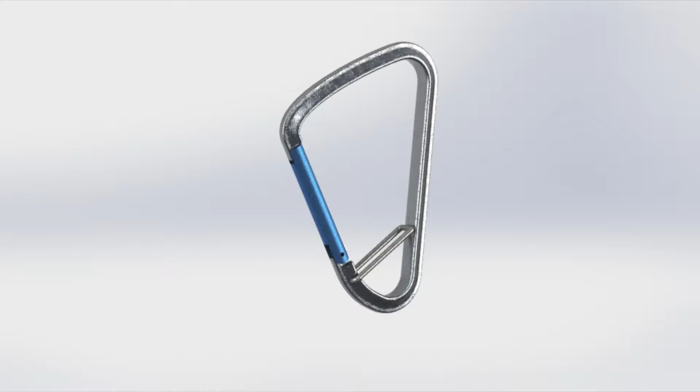Climbing gears are used by rock and ice climbers, mountaineers, and alpine skiers. Safety is number one. Lightweight and strength comes next. The tolerance should be extremely low, as failure in these parts is not acceptable. SolidWorks applications are used to fabricate the 3D designs electronically, and Abaqus CAE is used for structural analysis. Changes in designs were made in order to make corrections and have improvements.

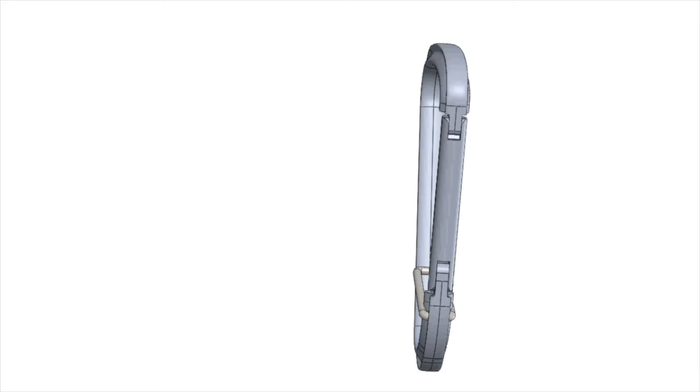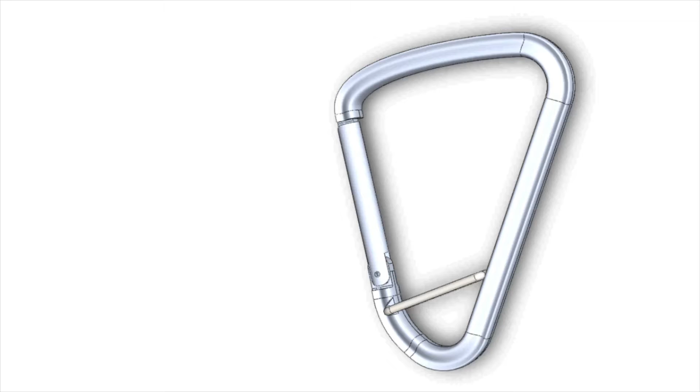The most basic tool in climbing gear is the carabiner, because it is the link between different pieces of equipment. For the design, I started off by looking at existing designs such as this one and this one. I came up with the idea to concentrate the load along the closed side of the carabiner, as that side is the strongest one. I did this by giving the carabiner an irregular triangular shape. The clip prevents the carabiner from rotating upside down or becoming subject to cross-loading, which is loading along the horizontal axis.

Shown dimensions are in millimeters. The opening of the carabiner is as big as possible for easy hooking and unhooking of ropes. Most of the load will be carried by the inside part of the cross-section. That is why more material was added there. Stress analysis on the carabiner with that cross-section shows stress concentrations at the top and bottom of the inside of the load-carrying axis of the carabiner and low stresses on the outside.

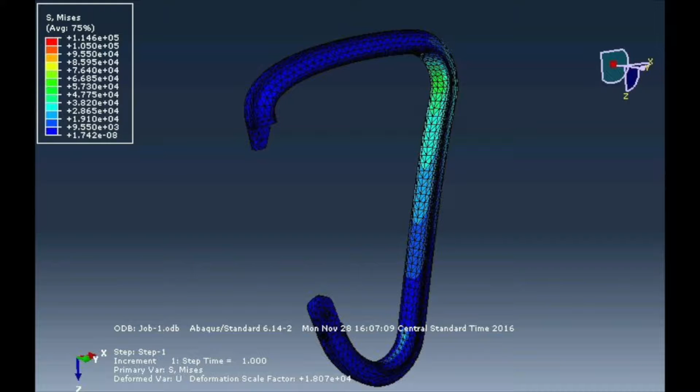So in order to make the design as efficient as possible, the cross-section was altered. This results in lower peak stresses on the inside surface of the carabiner and lower stresses on the outside surface of the carabiner. The final product has an aluminum core and opening link and a steel clip. The stress analysis shows that the carabiner can safely carry a load of 14 kilonewtons and weighs 17.65 grams.

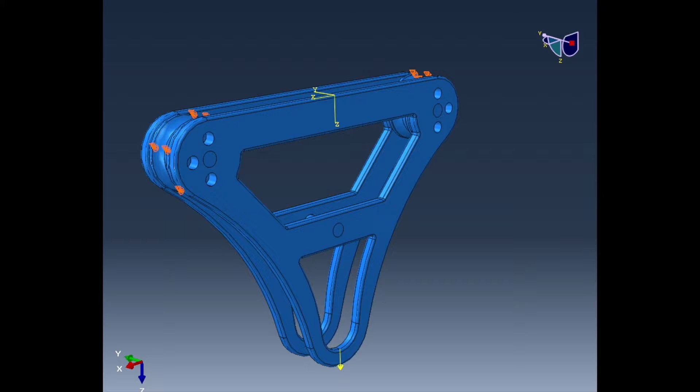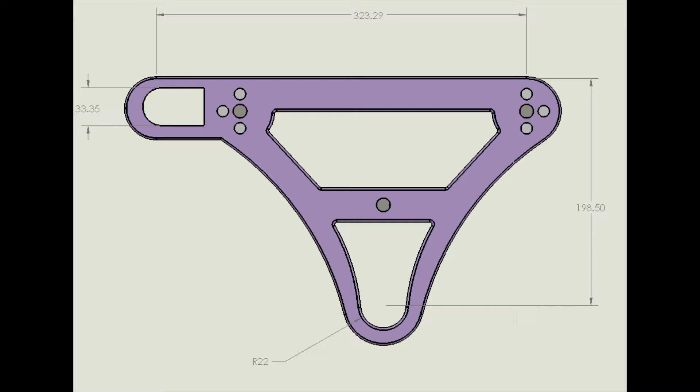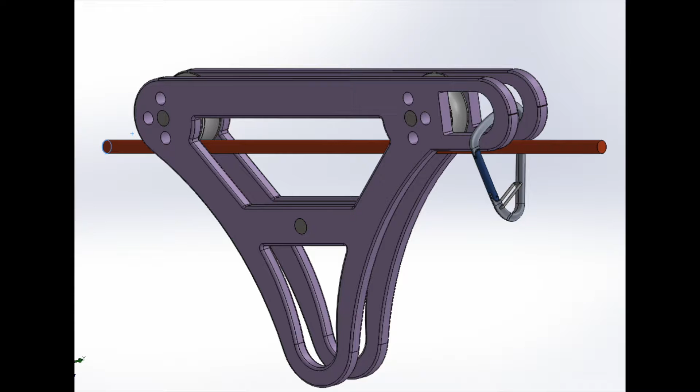For improvements of the design, I changed the thickness to 1.3 millimeter and added an additional hole at the backside to connect with a carabiner for user safety. I set the same material, aluminum alloy, and the same boundary conditions and load, and this is the result of the Abaqus simulations. I can check that the stress magnitude and deformation are less than before. This is how to connect the carabiner with the zipline. If the zipline is derailed for some reason, it could prevent the user from falling down.

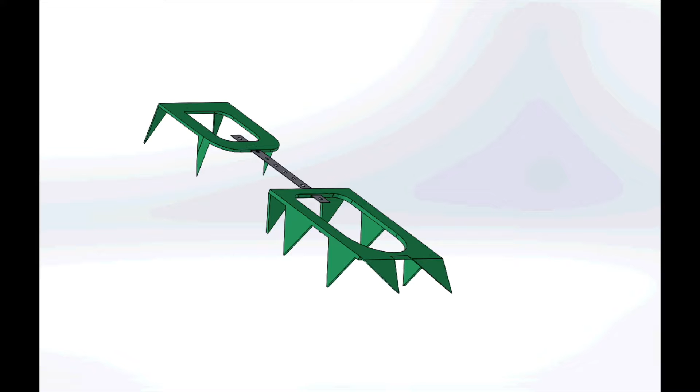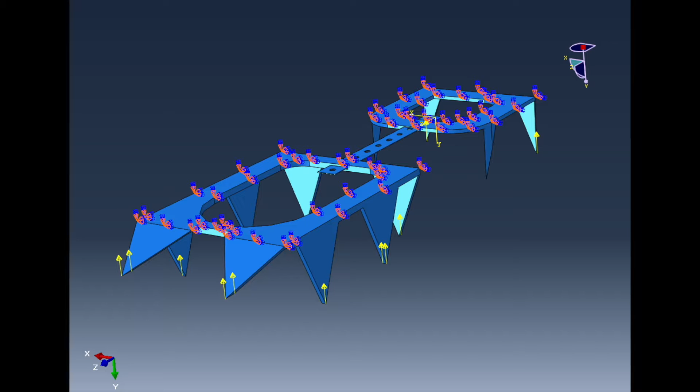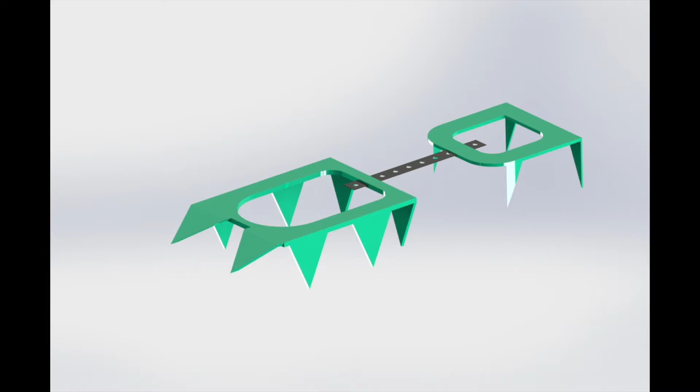Crampons are designed for secure travel on snow and ice for mountaineers. What I focused most on in my design was three features: lightweight, adjustable for multiple sizes, and strong enough to support the shocks of ice and rocks, especially the spikes. For my analysis, I added the boundary conditions on the top surface of the crampons, and I added my force concentrated on each spike. When running the analysis, I realized that the front end spikes are the most fragile. So I added some reinforcement to it, and this has decreased a lot the stress concentration on this part. For my final design, I chose aluminum as it is ideal and lightweight for alpine climbing. Each crampon weighs 65.4 grams.

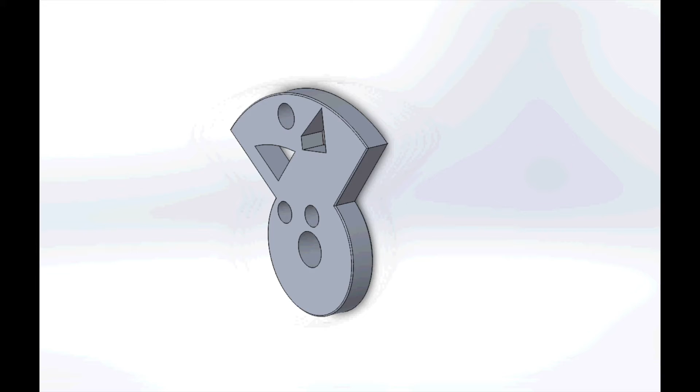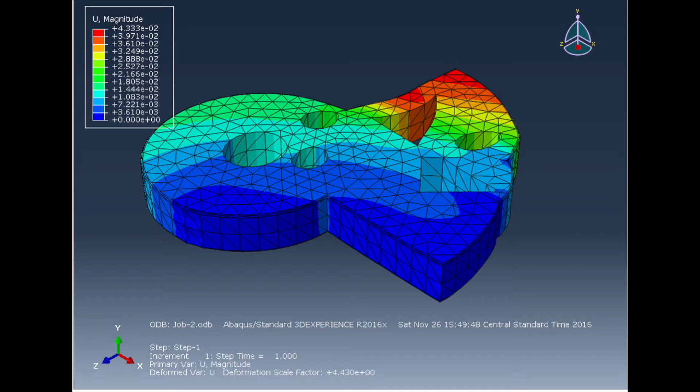In order to reduce the stress concentration, smaller holes are needed. This is my second design. I increased the thickness by 1 inch. And here is the boundary and loading condition for the second design. Here comes the result for the second simulation. The stress concentration as well as the displacement were reduced significantly.

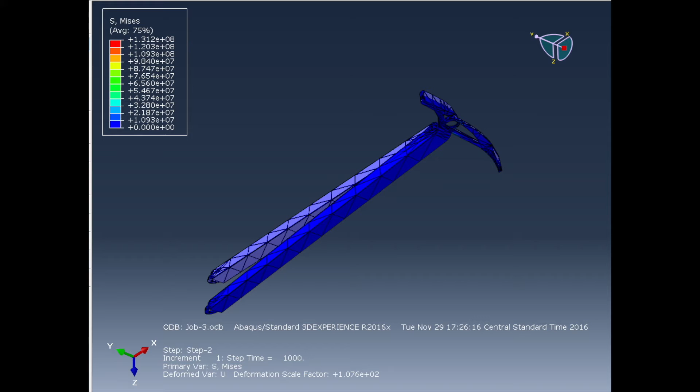The ice climbing axe is an essential tool keeping you stable up the mountain. Pick, carabiner hole, adze, shaft, and spike are key components. We are going to inspect the strength and the weight of this tool. By using the axe in a cane-like manner, holding from the head, we can get this kind of stress contour in the stainless steel material we selected. The forces and the stress concentration differ when the axe is used to slash or grab into the snow or ice.

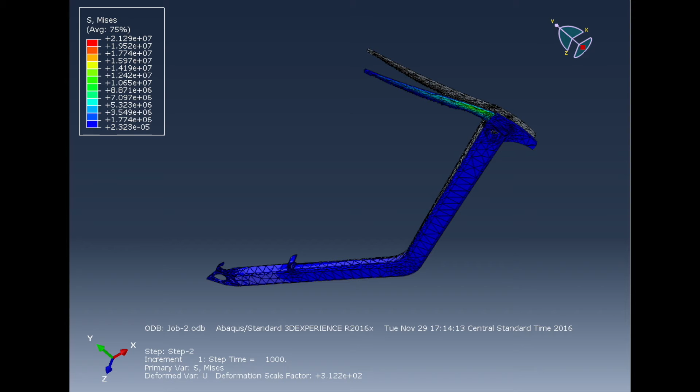Another form of the axe was examined from an existing design. This one has a reverse negative pick end and a curved shaft. This design is more efficient in swings and is easier to remove from the ice. However, it loses leverage and security when the mountain is steep compared to the first model. And here are the stress contour and the deformation. This is the revised model, which is the combination and optimization after observing the previous analysis. The pick remains classic with a positive curvature, and the shaft is slightly curved, so the axe doesn't lose the ability to anchor into the surface, while having better technical mountaineering efficiency.

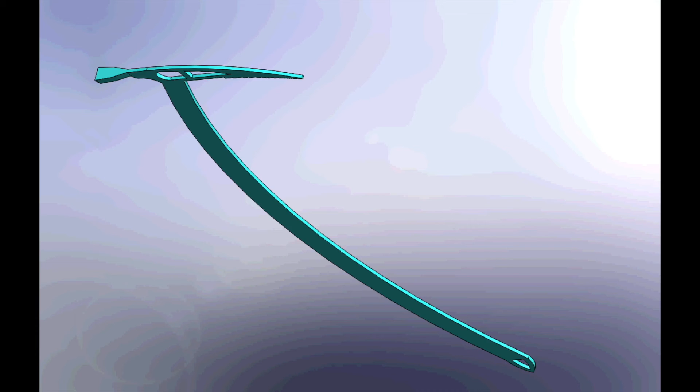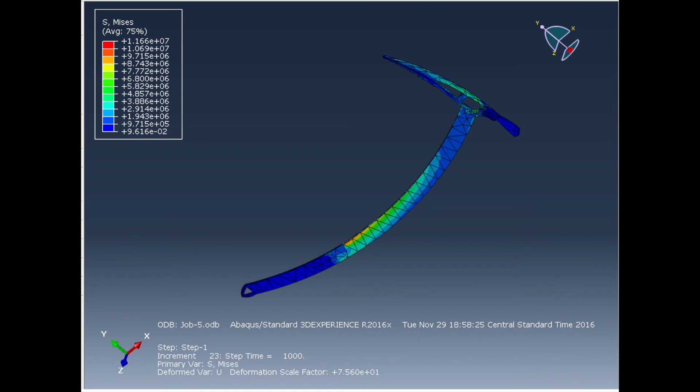I took away a good portion of the cross-sectional area since there wasn't any danger. It would be nicer to lose as much weight as possible. It can be coated with other lighter materials around the shaft, 2 to 3 centimeters thick, with ceramics, rubber, or aluminum. The image shown is just the steel material without the coating, which only weighs approximately 1.3 pounds. You can now see that the stress concentration is greater in the shaft area as it is thinner. However, the coating will support that part. The larger cross-sectional area proved to show less stress. Also, the loading is exaggerated here, as the axe is supporting a 500-pound individual and in multiple directions.